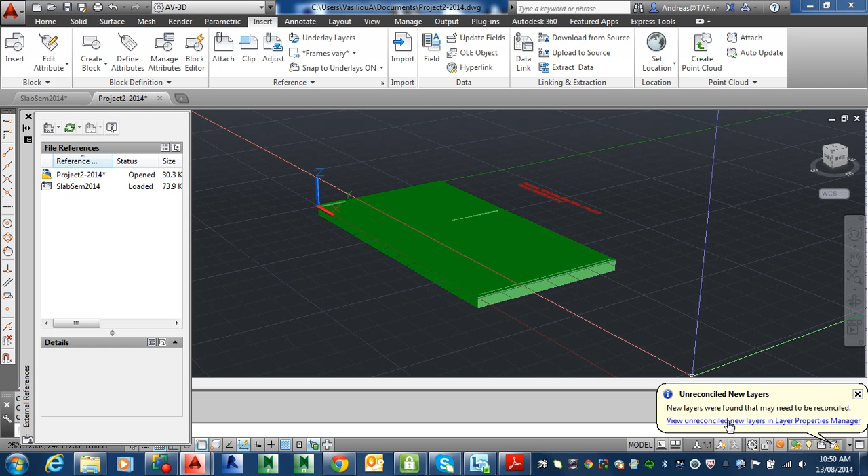Basically, the layers come into this drawing as they were in the other drawing. Now, if for example in this drawing here I had another layer called... where are we here? If we go to layers, if I had another layer called footings or slab in this drawing here, project 2, and the color for the slab in this layer was red, it would change it to be red.

If for example later on I went and did some more work on the slab, and I came into this project drawing here, and it sensed that there's been some new layers created in the slab, it'll just ask me to reconcile, just like we did before, to see what the new colors are, just in case I need to change them to conform with what I'm doing here. I might want to grey them out a bit, or change the color for printing purposes for this particular drawing only. Alright, so that's all that is.

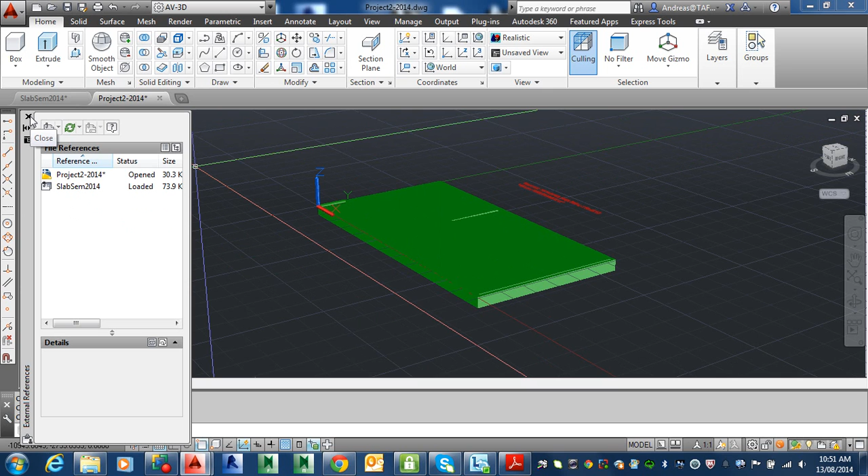It can be ignored really, so we won't worry about that. But what we need to do is draw some walls on here. So this thing here is landed just about 100 mil below ground, like the other one. So 0,0 is a good point to have as a reference. Alright, so now I'm going to draw some walls on here. What I'm going to do is use the poly solid.

Now the walls, just to demystify this thing here, it says 250 walls. It's not quite exactly like that. What that's made out of is actually 110 brickwork, then there's a 50 millimeter gap for the cavity, and then there's a 90 millimeter wall, which is out of studs basically, and that's what it is. So make the internal walls 90 millimeters, it says.

You can just add your own sort of design for the internal rooms if you like - bedrooms, kitchen, bathroom. Just make up whatever you want in there, it's free for all. The height is 2.4 high, or 2400. And then you might wish to add a roof, which is a 100 millimeter thick slab.

So what I might do is actually, first things first, create some layers. So let's go here, create a layer. We need a couple of layers - we need 3 actually. We need 2 for walls, because I've got a couple of different walls.

I'll have one for brickwork, and the little trick: if you press the comma after you finish typing your name, it'll come up with a new layer - creates a new layer. It's like pressing this button here. So that's what I did then. Wall dash, call it walls. Let's just call it wall dash studs.

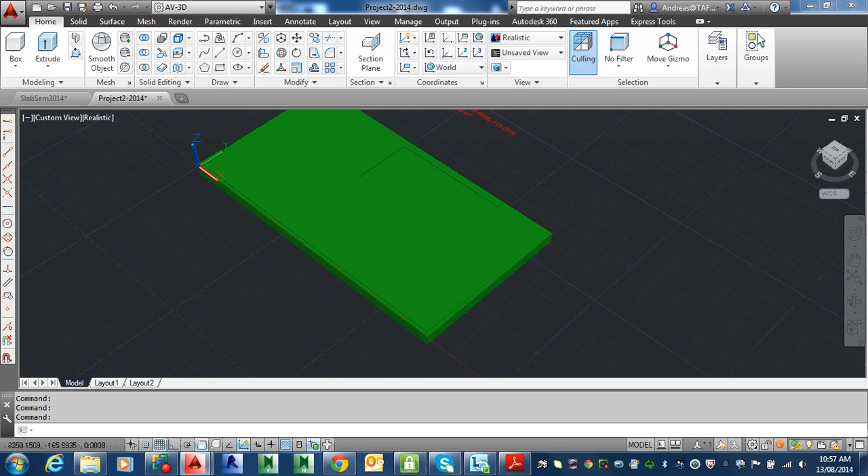All right, so let's draw these things before we run out of time. Let's set the layer - we'll go with studs first, because it's an internal wall, and plus it's the way it's getting built. In real life, it will get built with the studs first. Also, if I start drawing the internal wall, it will be easier for me to then draw the external wall. If I draw the external wall first, I won't be able to see to draw the internal wall in afterwards.

Okay, we've got too many greens here now. So I do have the option, if I want to, to go here and change this slab to something else, so that I don't have too many greens. For example, I might make this one just like a grey color, something more like concrete. I can change that, and it will remain like that even when I update the drawing next time, as long as the command called VISRETAIN - I'll type that in for the record - is set to 1, which it is in here.

It will retain the colors that have changed in here. So let's go with this ugly grey looking thing here, which is not very good. Let me just lighten it up a bit. All right, so now let's draw.

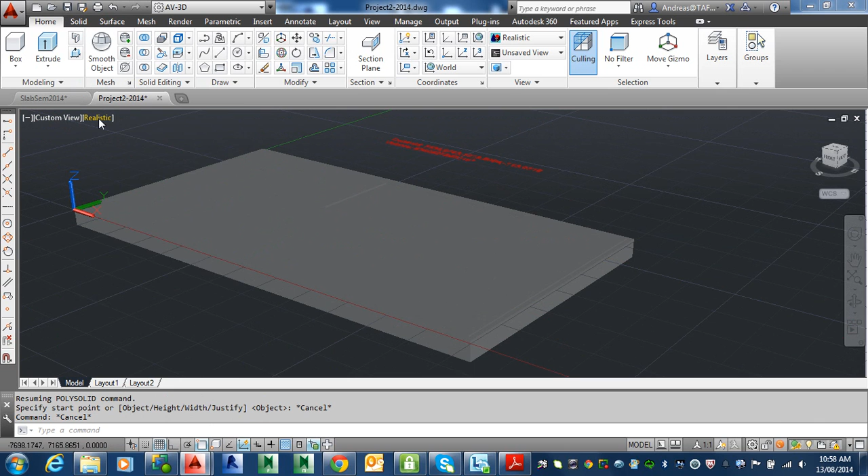I'm going to use this polysolid, which is right here, and I might use a different display for you to look at better - I'm going to use shaded with edges. You'll be able to see a bit better the set down like there. I'm going to turn off perspective, because when I zoom in, it doesn't let me zoom in easily, I can't control it. I'm going to set that to 0. So a few settings before I get going, and it's much easier to zoom now. Let's go with that.

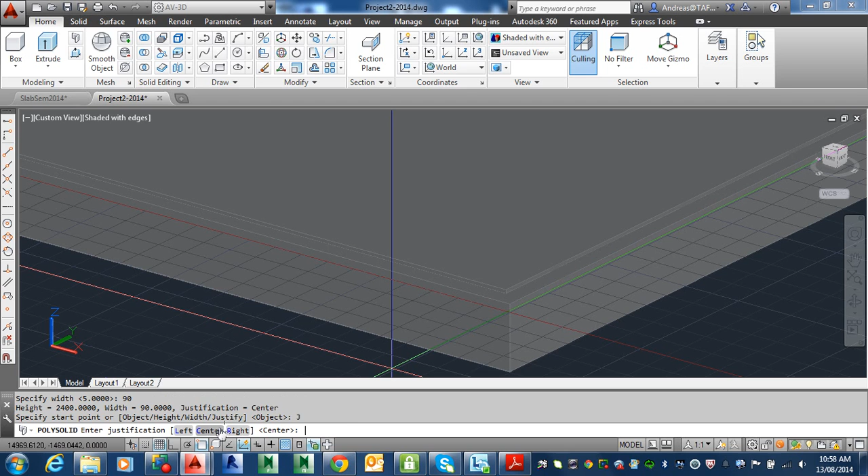We said the wall is going to be 2400. Let's go with the height to 2400, enter that. Let's go with the width - it's going to be 90, and I'm going to go left justified. All right, so I'm going to start drawing this thing from here.

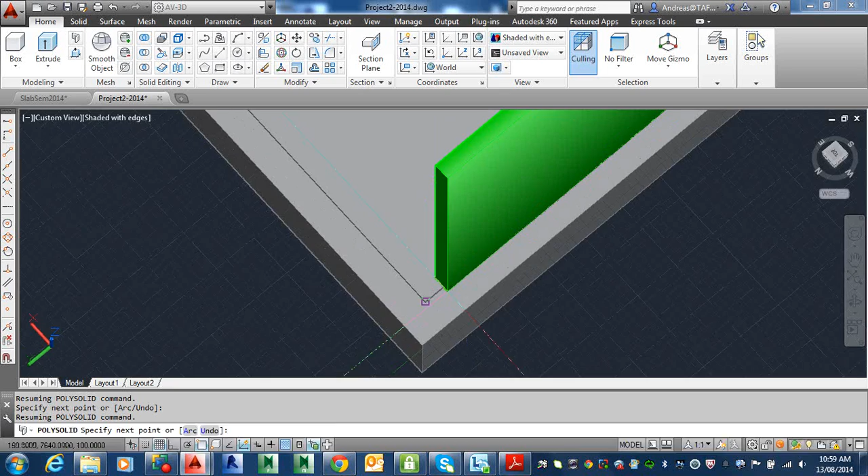Now be careful, zoom in so you can actually see there's lots of little endpoints and stuff there. So let's do that, zooming in, there's one there. Hold the shift key down, middle mouse button, and swing around. That's there, do the next one. Right, here we go again - just lift yourself up a bit there so you can get the right endpoint. There we go, so really have to zoom in. Ooh, I think I pressed shift right-click there, so just escape once.

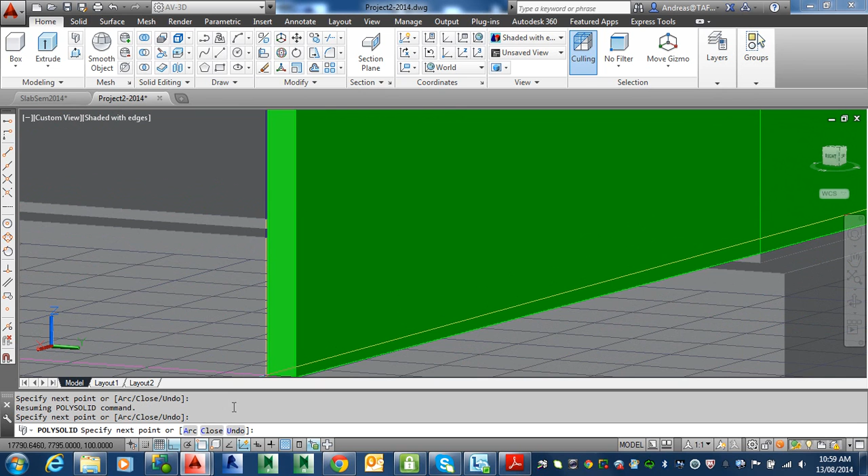Going too fast, just in this end here. Ooh, there we go. There. And then we can just close there. So click on the close, and there it is. So that's the internal wall there.

While I'm at it, I might draw a room in here just to give you an idea of how to draw a room inside. Okay, so basically I'll just continue. The settings are the same, so I might as well do it now.

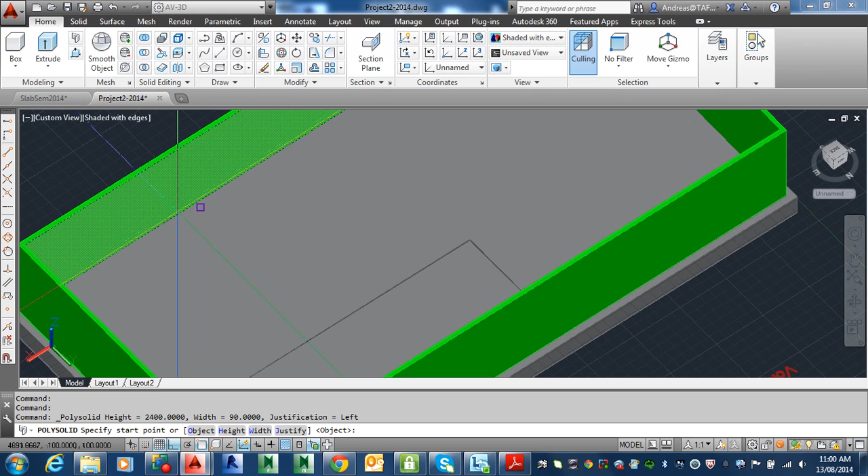Now I want to start this room from somewhere. In this case, it doesn't really matter where we started from. It is latching to the midpoint and that sort of thing. But for once, I'm just going to arbitrarily start it from about there. So shift right click, I want to use this nearest option, which I don't use very often. And I'm just going to latch onto there.

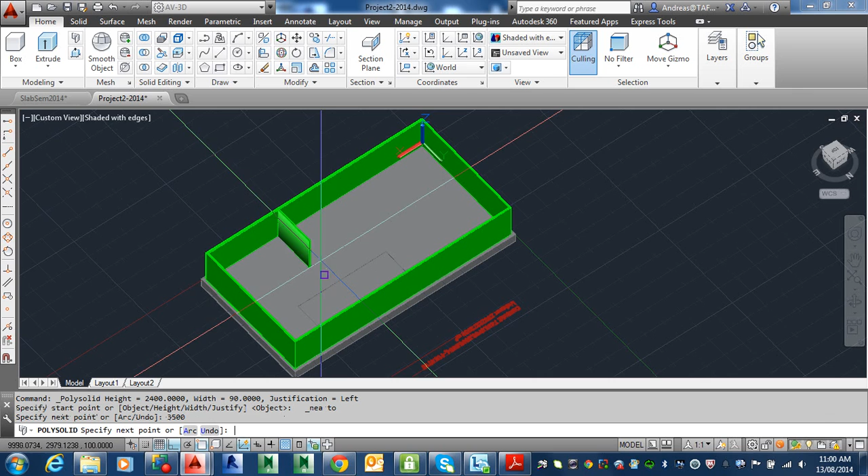Just zoom in there, make sure we get that. There you go. Ortho is on, so I'm going across here. I can type in a number, so I can put in anything I like, 3500 for example, and then I can come across here and just finish it off against that wall there.

Just get in here. Now it will latch onto the midpoint, but I don't want to go to the midpoint. I want to go straight across, so I'm going to use a perpendicular, which is this one here. If you've got that there, or shift right click, and now where's... there you go. You've got to be careful, there's a few others over here, like it's sort of finding the perpendicular to the outside of the concrete there, so you've got to be careful which one you get. So I'll go there at the bottom of that and click there, and there it is, and enter to finish.

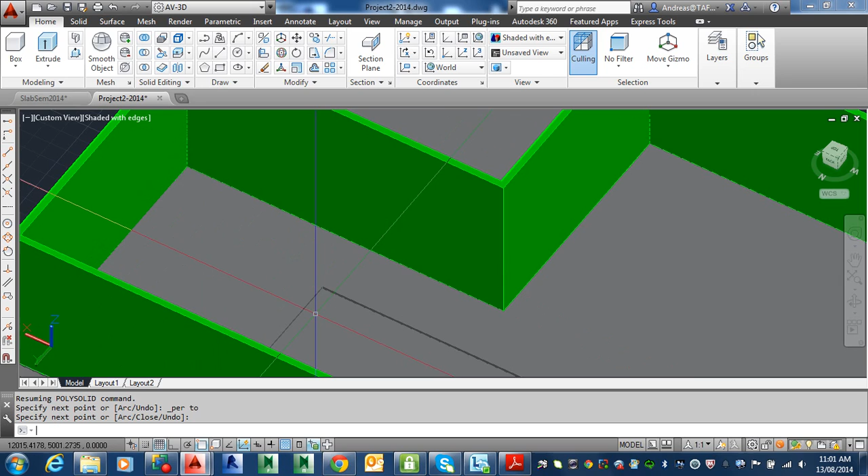Alright, so that's all I'm going to do and you can do the same idea for kitchen over here. If you want to put a kitchen or something, you just leave it at that. But I want to put in the external brick now.

Racing along, we've only got like 2.5 minutes left here, so let's go with the brick. And this one here, I'm going to set the height to be a little bit taller, because we've got a little set down of 30 millimeters already, so 2430 is what we want. And let's go with the width, W enter. That one there will be 110, and justification shall remain as left, which is fine.

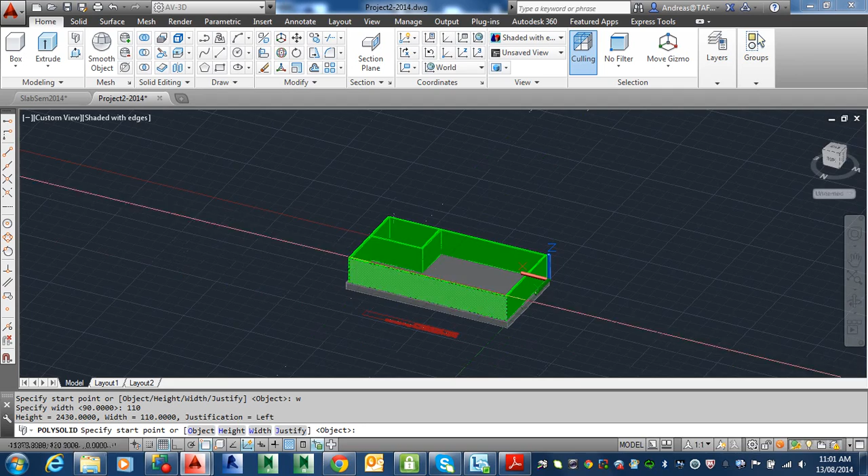And let's go here and grab the endpoint of that. Oh, I didn't change the layer. I should have done it in the brick layer, but you know, this happens. It's not the end of the world. We can change it after.

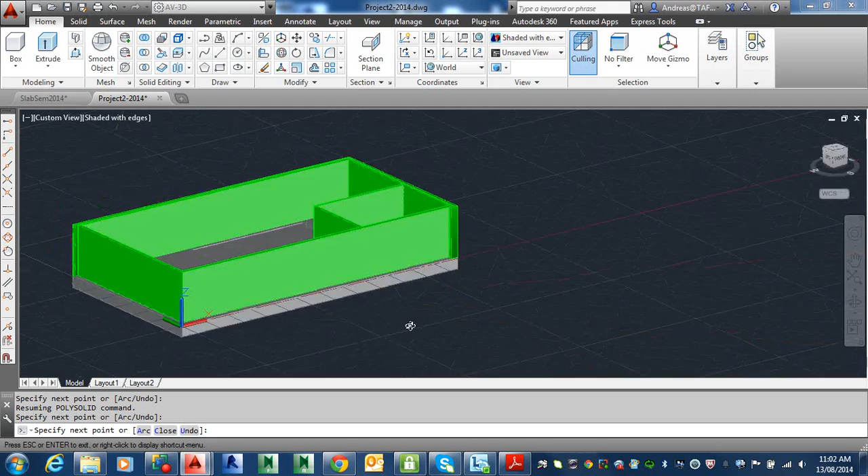There and there. I think I got that there. And see for close, there it is. I look from the top. It should be all level in theory, except the wrong layer.

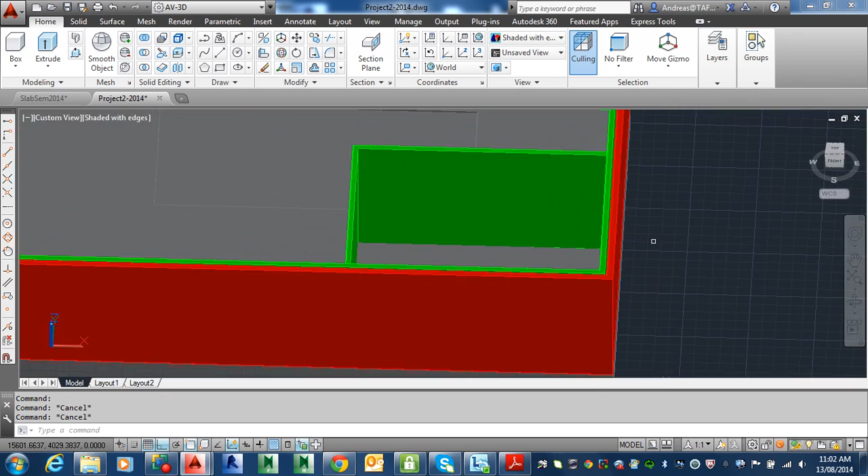So I'll just click on here, 3D solid, yes, and go to the layers here and change that to be wall brick, and there it is. Okay, so that's that there. We'll do some openings in a minute.

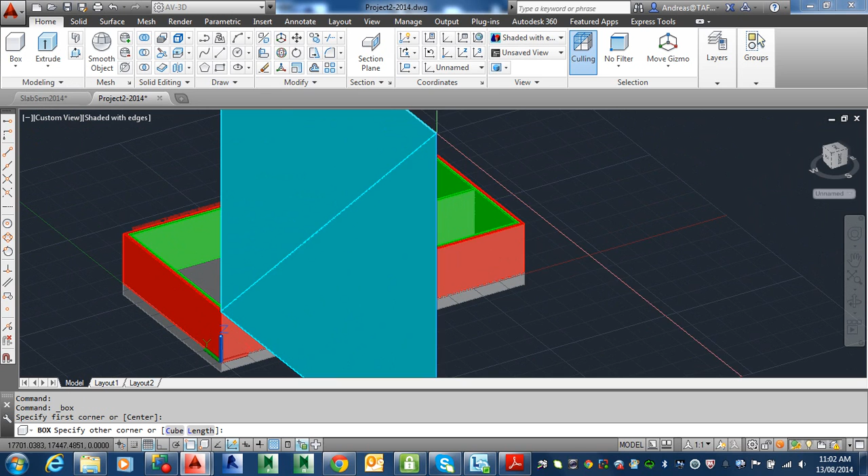If you want to put your roof on, I'll just do that, finish it off as well. Roof, let's change that to the roof, and I'll use this box to do the roof. And basically we'll start from the corner here, and see how that's actually, it's not working for me because it's picking up the edge. So I might just turn off this dynamic UCS for a minute, see if that works.

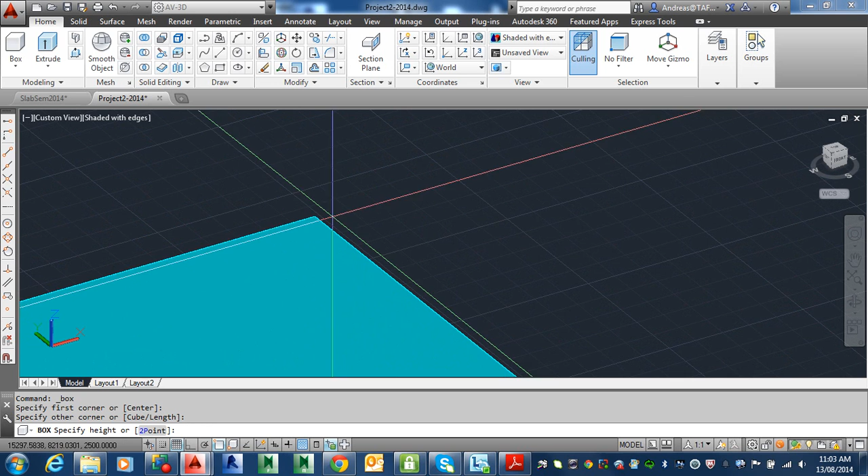There you go, that's working on the flat. So the dynamic UCS was thinking I was drawing on that surface there. So that's what the dynamic UCS usually does. So it's done its job probably, but except I didn't want its help this time, and I put the height of 100 as that there. So there, it's got a little lid on top at least.

We can turn that off, so that's fine. Let me just go back to a layer 0, and I'll just turn off that slab so we can see through it. Just turn off the roof for now, even though we've just put it on. All right.

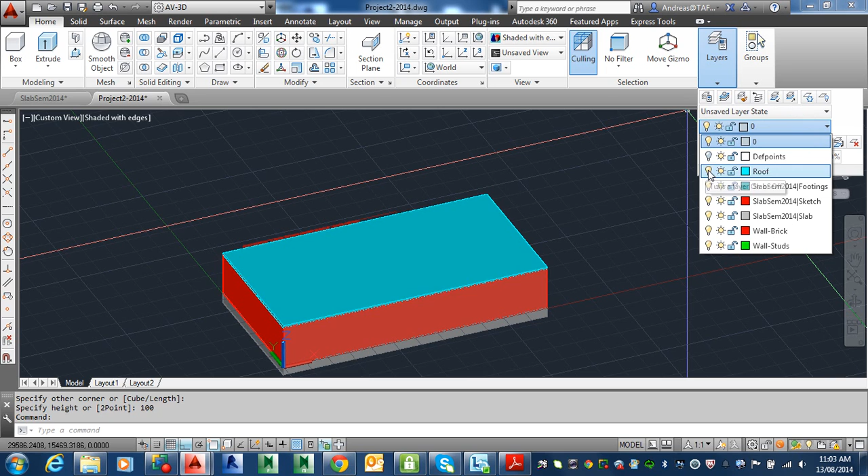And we'll leave that one there, and we'll continue with some openings on this drawing, and then that should be pretty much it.